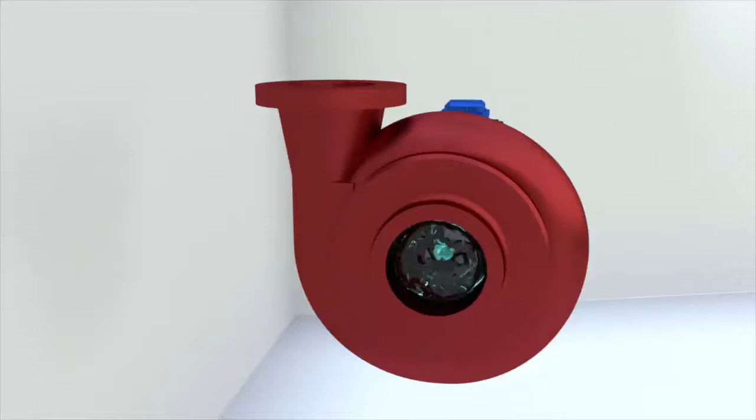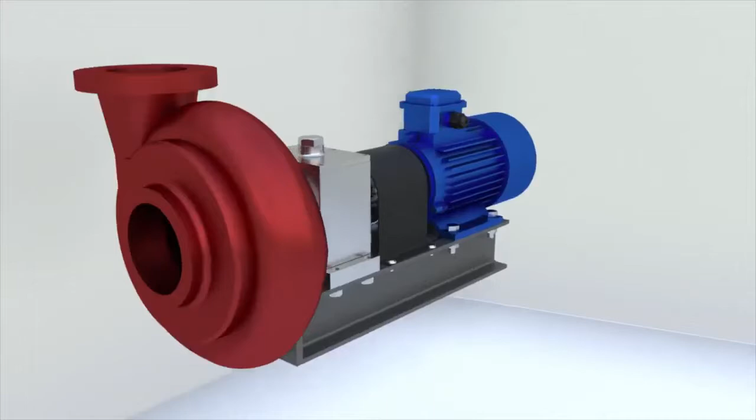How does a centrifugal pump work? Centrifugal pumps are used to pump water, oil, and other liquids. Let's try to understand why these pumps are designed to carry out the task of transporting liquids successfully.

The main elements of a centrifugal pump are the casing and the impeller, which drives the liquid. The impeller is mounted on a shaft. The shaft can rotate on bearings. The power is transmitted from the motor, most often an electric motor, to the shaft.

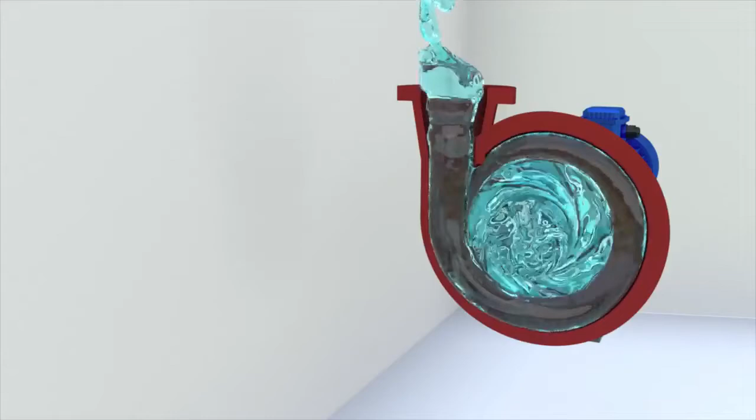The impeller of the pump rotates together with the shaft. The vanes in the impeller act on the liquid and make it rotate. The liquid particles are accelerated. As a result of the impact of the vanes, the energy of the liquid flow is increased.

The accelerated liquid particles enter the volute, which converts part of the velocity into pressure. The diameter of the passage section of the volute and the discharge nozzle gradually increases. The fluid velocity decreases, and the pressure, according to Bernoulli's law, increases.

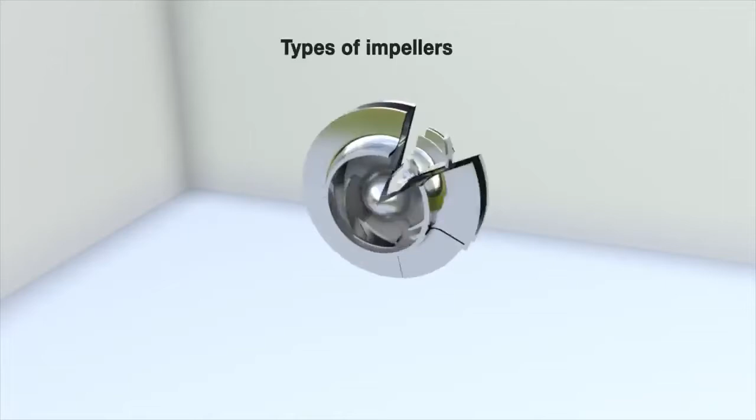Three main types of impellers are used in centrifugal pumps: closed with back and front discs, vanes and fairings; semi-open with the vanes free on the front side; open with the vanes free on both sides.

If bearings support only one side of the shaft, the pump is called a cantilever pump. It is a versatile design that is used in small and medium-sized pumps.

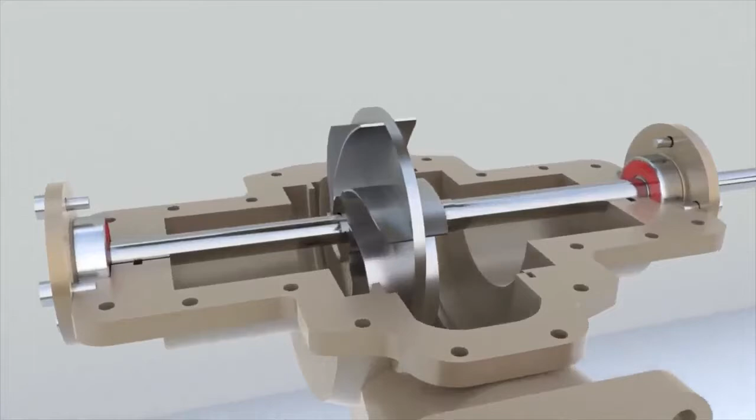A heavy impeller cannot be cantilevered. In this case, the shaft is mounted on bearings and the impeller is placed between them. This construction scheme is well suited for double suction impellers where the vanes are placed on both sides.

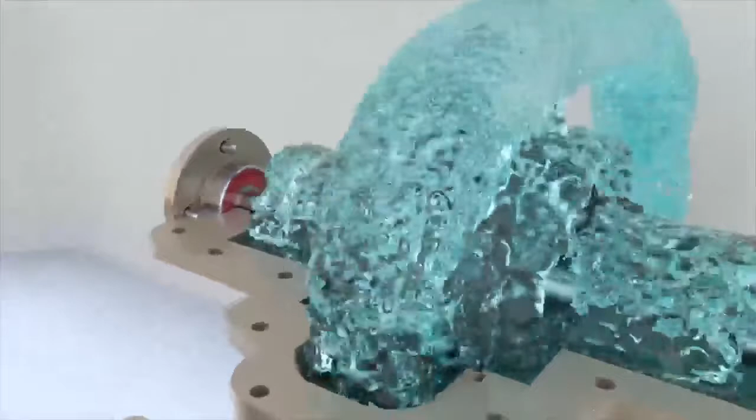A double suction impeller allows liquid to enter the impeller blades from both sides. Thus, we have two pumping units without significantly increasing the weight and dimensions of the pump. This scheme is relevant for pumps with high capacities because the pumping units are installed in parallel.

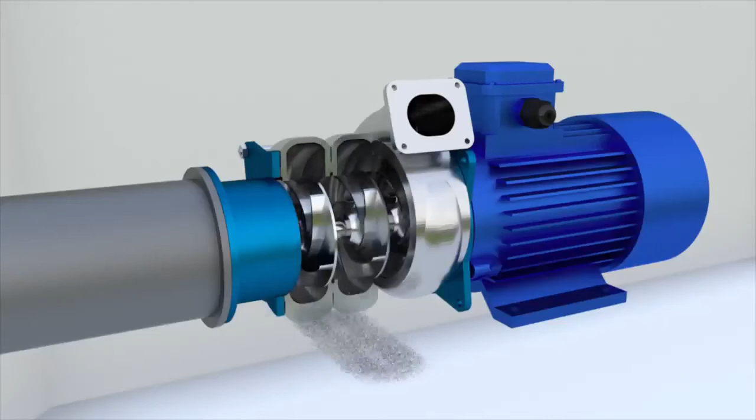Multi-stage centrifugal pumps: by installing pumps in series, the head of the liquid can be increased in the system. Pumps installed in series can be combined by placing several impellers in the same casing. The liquid will go from the first impeller to the second one, from the second impeller to the third one,

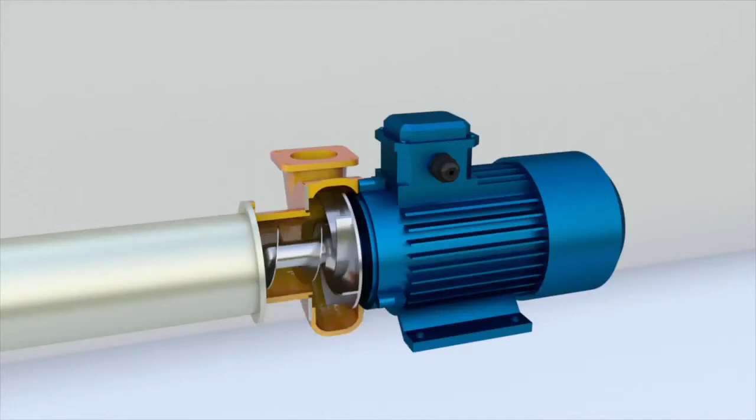and so on. Using a multi-stage arrangement can increase the head of the pump many times over, as the impellers are mounted in series, and each of them increases the head. In multi-stage pumps, different impellers can be used.

For example, a screw centrifugal pump has an auger on the first stage and a centrifugal impeller on the second stage. When the pump is running, the liquid flows continuously into the pump casing through the suction nozzle.

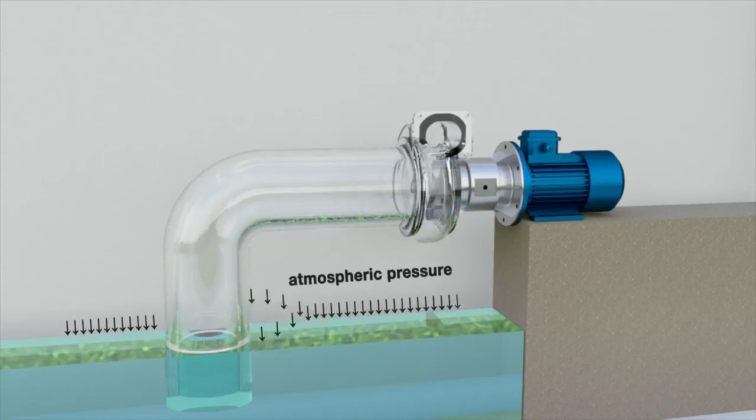But what happens if there is no liquid in the pump? For example, when the pump is first switched on, the pump casing will be empty. For the liquid to fill the pump, the pressure in the pump casing has to be lower than the atmospheric pressure. Then, the atmospheric pressure will cause the liquid to fill the casing.

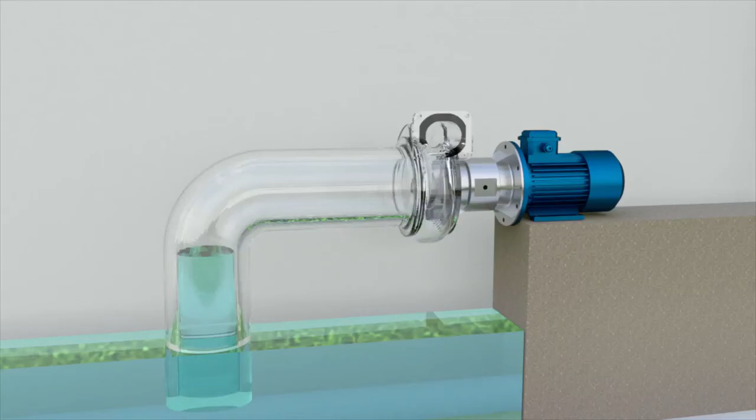To reduce the pressure in the pump, some of the air has to be pumped out of the casing. Is an ordinary centrifugal pump able to do this? The answer is no, because the particles move in the pump due to inertia, which depends on mass.

The mass of air particles is much lower than that of water particles, so it is impossible to pump air at speeds that a centrifugal pump operates at.

For this reason, centrifugal pumps must be primed before switching on, either through a special channel in the casing or through the discharge nozzle.